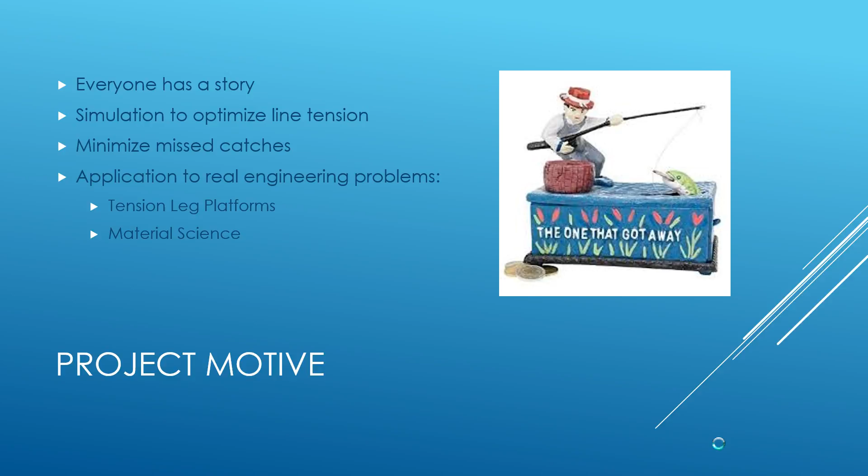But it also applies to rigs on oil platforms. So if there's a hurricane coming through the Gulf, how do you know how much tension the line should provide to have the rig stay in place, or give it slack so it can oscillate with the wave oscillations? And so that's where we get our project motive, and we can start from there.

All right, so as with any control system, you have your sensor, your actuator, and your controller. So our sensor, when we actually implement this, we're going to use a fiber optic strain gauge, and that will constantly monitor the tension in the line. For the actuator, it'll just be the reel. It'll be connected to the boat, and we'll just have a simple PID controller connected to that.

For the system parameters, the control variable that we're going to have is going to be the tension in the line. Initially, we had started with looking at all the possible sources of force, and it was a three-dimensional momentum balance, and it was a really big pain. So we simplified it into just a one-dimensional problem for this project, and for future development we can expand that into second and third dimensions.

For the manipulated variable, it'll just be the reel speed of the motor, and we'll be able to vary that, as you'll see in a couple slides, with a slave controller. It'll vary the voltage to the motor to get the specified RPMs. And for the disturbance variable, it'll just be the movements of the fish on the end of the line.

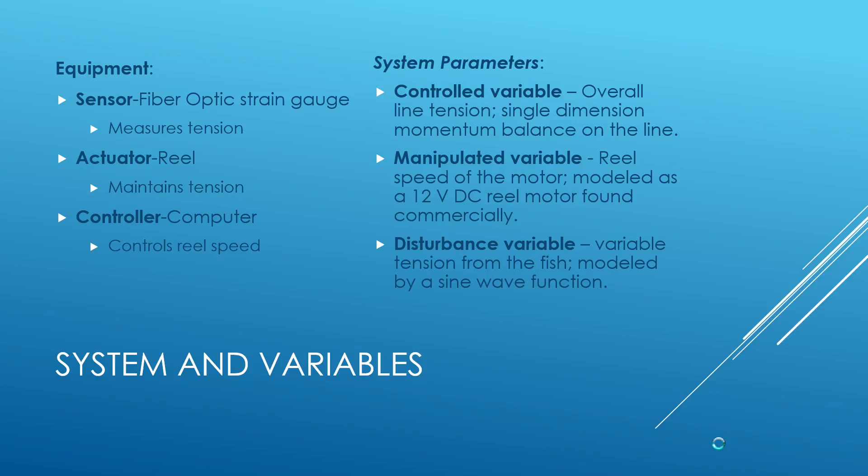And because the fish's movements are random, essentially, it was kind of difficult to model. So what we decided to do is to use a sine function. And that way we kind of get a minimum and a maximum force that the fish could exert on the line. It kind of gave us a range to work with.

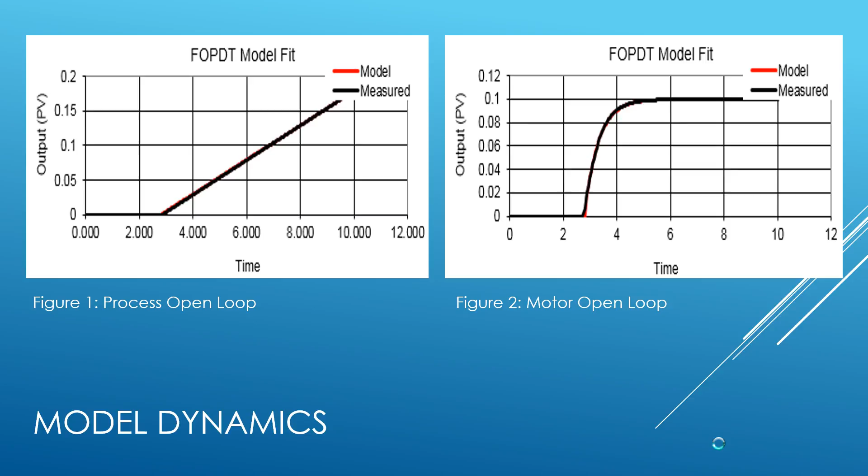So in developing our model, we have our two graphs here that represent the open loop tests for both the process and the motor. And as you can see, we got a really, really good fit for both of those. For the process, you can see it's linear, and that's what we expected. We were happy to see that, because our model is based upon Hooke's law, which is a linear model.

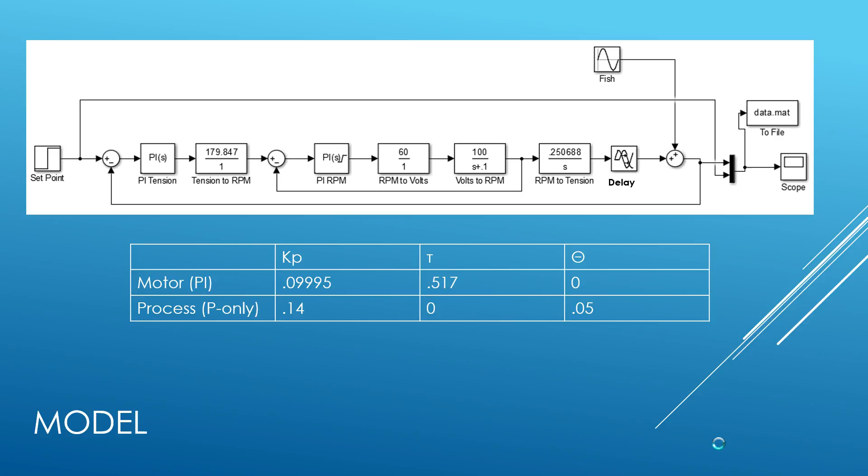So we took the product of these transfer functions, and we were able to gain a root stability analysis. And since that was a sixth-order transfer function, it looked a little bit different from what we saw in class. But what was really interesting was that at 0.4508, we found out that's the max on our stability. And that actually was modeled really closely to what the system actually did.

So we decided to do a selected gain of 0.14 to account for disturbances, and we also discovered that if we use some more complicated models for motors, no matter what we did, it was inherently unstable. So we took a simplified motor transfer function, and it worked quite well.

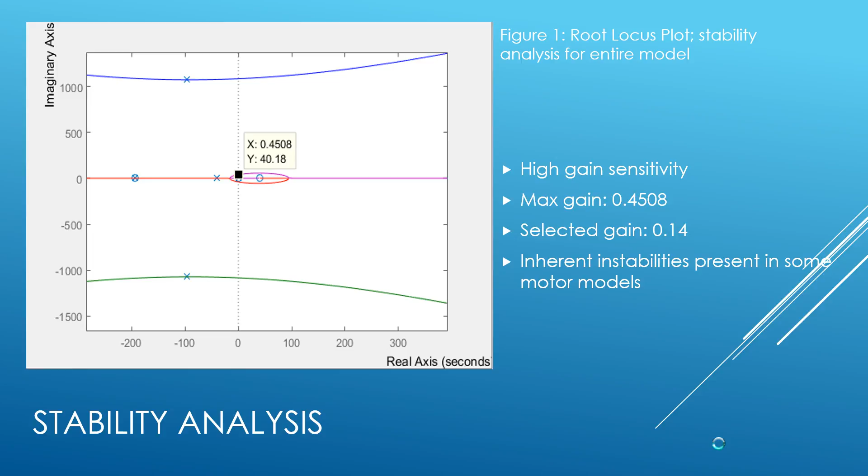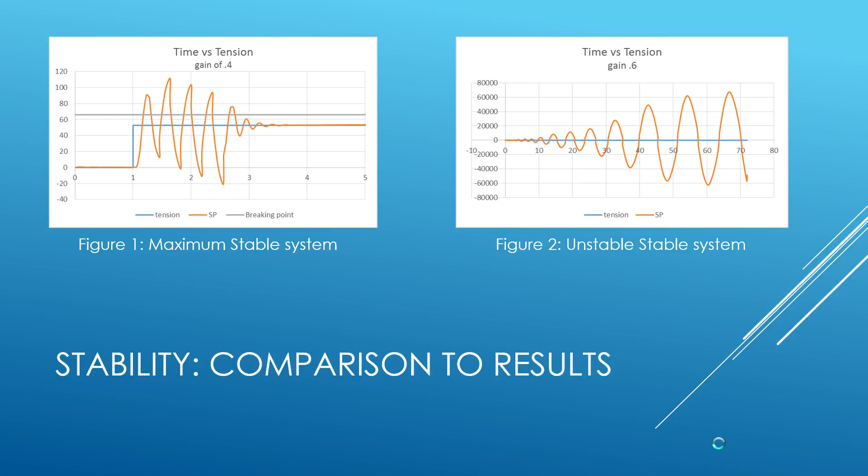Here's the experiments that we did with the actual simulation. So here we see at a gain of, let's say, about 0.4, that's what the experiment was. We actually see stability at the end. At first it had some pretty bad oscillations, but at a gain of 0.6, it was inherently unstable, which matches the root stability analysis.

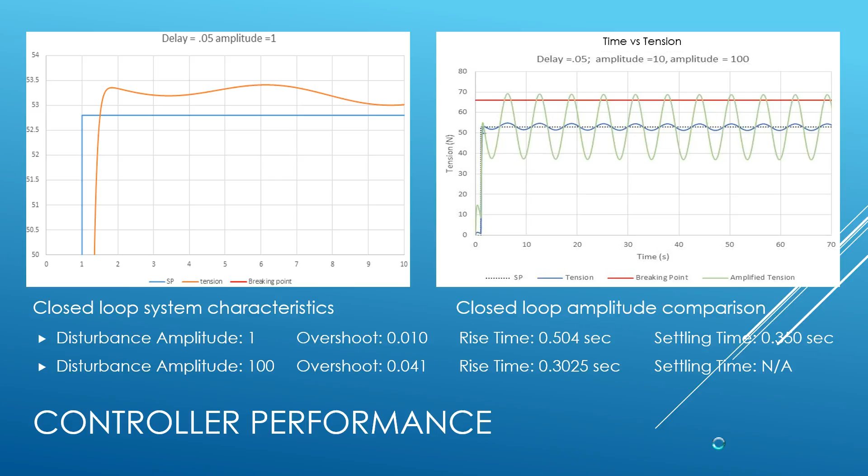But there are further developments that need to be accomplished here. So just as Brendan said, we can't catch a marlin on a 2-pound line, but if we can better model that fish, and we know marlins will pull and rest and pull and rest, and that's the reason for our sine function. So a better development of the motor and a better development of what the fish is actually going to do. Maybe a feed forward to kind of predict what the fish will do will give us better results and be able to catch a fish a lot bigger than this one.